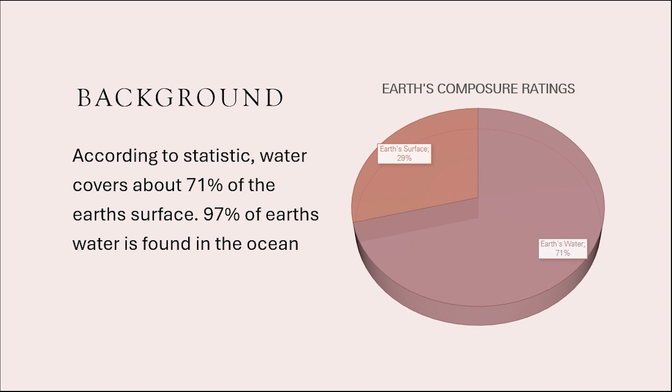Coral reefs are generally a small underwater ecosystem characterized by reef-building corals. It's an ecosystem of animals that have different shapes and sizes. They are mostly found in shallow waters in tropical oceans near the equator.

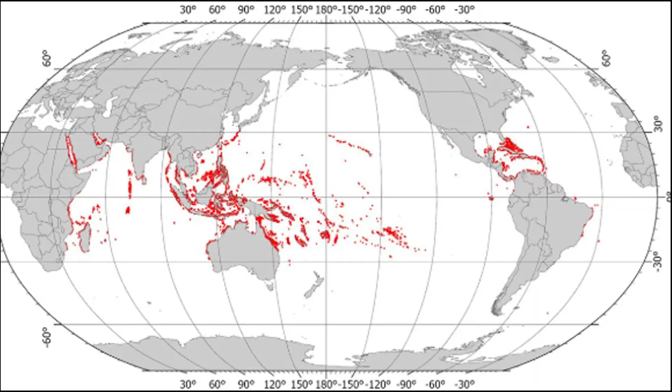Problem statement. Coral reefs are greatly affected by climate change. One of the most interesting problems is ocean acidification, which happens as a result of climate change. Ocean acidification refers to the ongoing decrease in the pH of the ocean, which happens when the carbon dioxide from the atmosphere dissolves in the ocean.

It reacts with the water to form carbonic acid, thus increasing the concentration of the hydrogen ions, which then lowers the pH of the water, making it more acidic. As a result, the animals that build shells or skeletons are not able to build them, resulting in their deaths.

Coral reefs have a food chain. If the chain breaks, it leads to many marine animals in the reef to start to die out and eventually become extinct. Our aim or solution. This problem can be solved by putting an end to climate change. However, from the looks of things, it will not happen overnight.

Hence, we aim to help put a stop to this problem by building a device that will help balance the pH level of the ocean to help maintain the perfect living condition for all the reef-dwelling creatures. What we hope to achieve. We hope to help maintain the ideal pH balance needed for all the marine animals to dwell in.

We want to help conserve the marine life because it is mostly overlooked and it is mostly not talked about in most cases. We also want to help raise awareness about the true value of marine life and help educate other people about the importance of marine life.

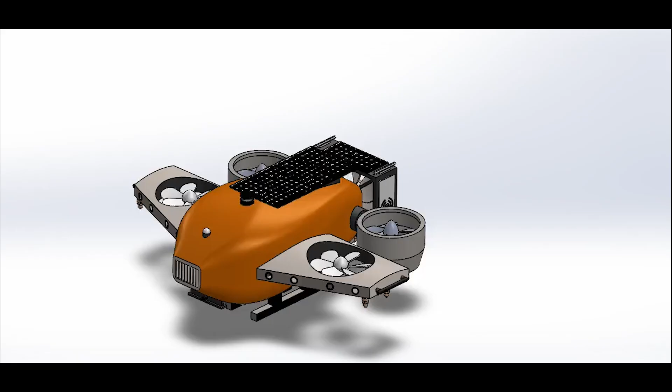Prototype design. We came up with a prototype of the device we were planning on using, and it consists of the device and the home hub. As we have alluded in the report, the main function of the device is to diffuse alkaline. We also made a base, a home hub, where the device will be able to rest when it's idle and also refill its reservoir.

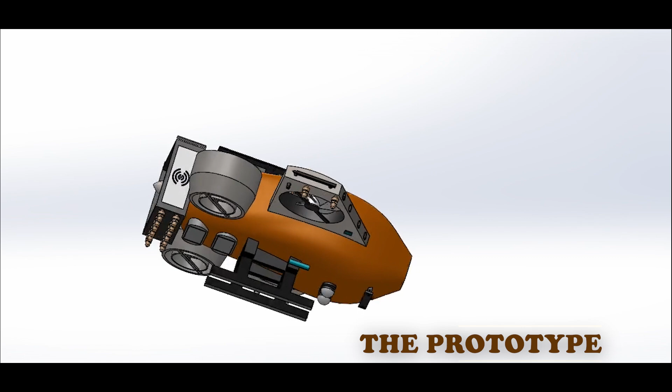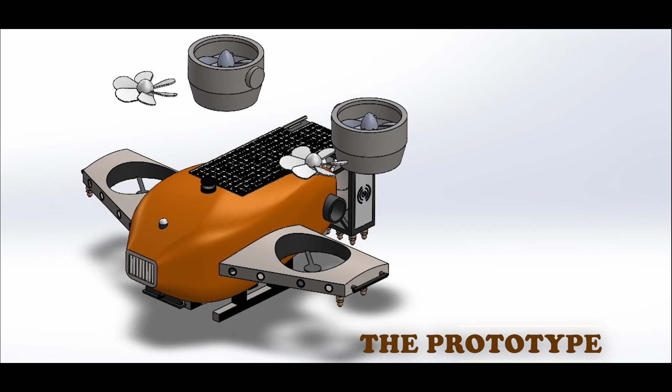Let's talk about the device's prototype. The device is made from stainless steel and it has a double casing, namely the outer and inner. It is also IP rated at 68 for both water and dust resistance. It has 5 combined propellers in total, with 4 that are responsible for the motion. 2 of the propellers allow it to move up and down, and the other 2 allow it to move forward and back, and all the propellers have a combined torque of 240 Newton meters.

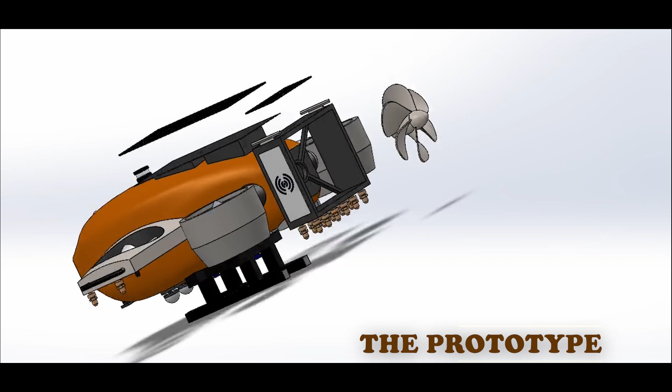The 5th propeller is attached to the alternator, which is housed inside the device, which charges the battery while the device is functioning, and the device is also equipped with solar panels in case it needs to recharge without using the propellers. The device has multiple sensors all around it as portrayed on the screen. We have the salinity sensor to measure the salt content of the water, which affects buoyancy and corrosion.

It has a wireless charging pad for the device to reverse wireless charge the home hub's battery. It has a LiDAR sensor to help the device navigate its way and to detect and avoid obstacles. It has 360-degree cameras for live streaming and recording. It has a temperature sensor to monitor water temperature, which can affect performance of equipment.

It has a strain gauge to measure the deformation of material under stress, which can help detect potential structural failure. It has a corrosion sensor which helps measure the rate of corrosion of material. It has a pH sensor to measure the acidity or alkalinity of the water. It has a depth sensor to enable the device to interact with the environment.

It has a dissolved oxygen sensor to measure the amount of dissolved oxygen in the water. It has an ultrasonic time of flight sensor to use sound waves to measure the distance to an object. It has a pressure sensor to measure the water's depth and to calculate absolute pressure. It has LED for lighting during nighttime.

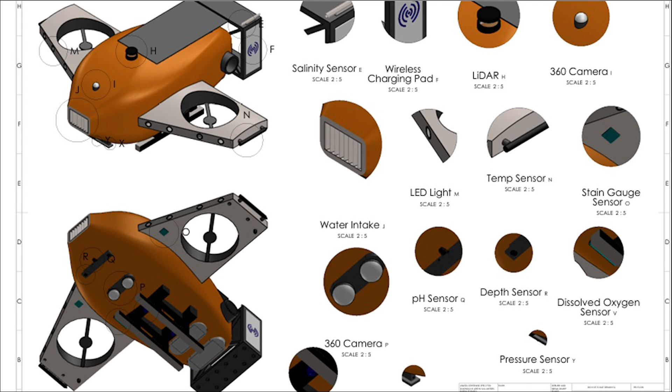The device will suck in water from the water intake in front of it, and it will test the pH of a specific area and figure out how much alkaline is needed, and it will be able to diffuse the alkaline water out with the 20 sprays that work independently from one another, and it will have a capacity of 2 liters per device of dry alkaline powder.

The water intake will work with the LiDAR sensor to ensure that no animal gets sucked in despite the size. And in case of a slip up, the intake has a small micro stainless steel mesh that will prevent fish and debris from entering. The device will map out the area it needs to spray the solution before it starts, ensuring that there is balance in pH throughout the reef. It will be able to refill its reservoir from the home hub with the airtight seal that it has at the bottom. Let's look at the home hub.